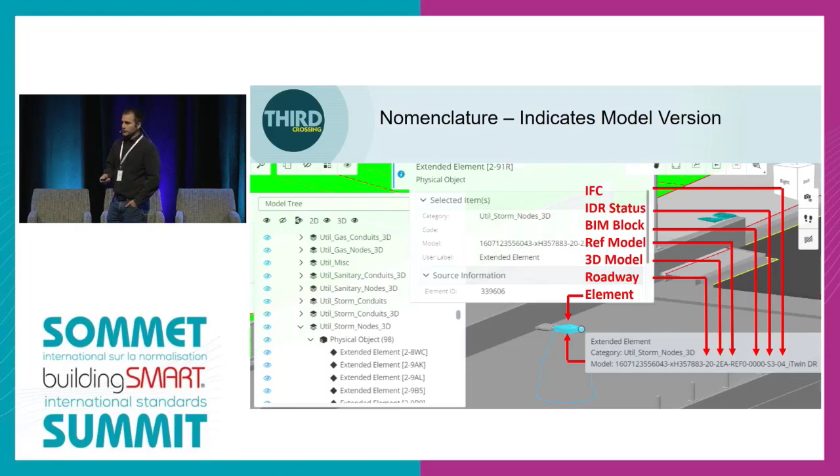The model progression followed a predetermined course that provided us direction on where our model was at each particular design phase, with the help of suffixes. There's an alphanumeric code we used. For example, for components in the model, you'll see we're highlighting a bridge scupper on the bottom, with identification and suffixes in the bottom right corner. Reading this text string tells us what version the model and block we're working in, and the direction we're going. In this case, we're doing an IDR for the actual IFC drawing itself, shown by those little numbers in the corner.

One of the key advantages of using the IPD is that it promotes a highly collaborative work environment. We all have to get along, you know.

So the design phase had an interdisciplinary review process at each design phase that allowed the team to collaborate and work together to develop, to provide comments on the designs as a group, but also be able to see everyone else's comments live in the 3D model space.

So we would get together as a team and resolve all the comments that we could at that particular design phase. So if we're at 60% design and we weren't actually all the way done, some of the comments had to be deferred to later phases of the design. And then we would address it once the progression of the design occurred a little further.

Now, the key benefit of using BIM here in the 3D model space was conflict resolution and identification. So we know where our pipes are going, if there was a pier in the way or whatever like that. And that really saved us a lot of money and heartache when it came time for construction and enhancing our construction methodology. I'd like to take this time to pass on to Francois to talk a bit more about the main span.

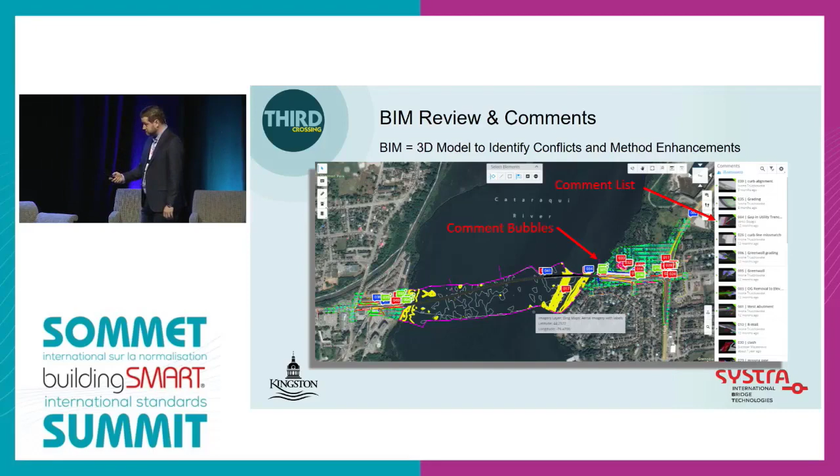So the next part of the presentation is going to be focused on the main span of the bridge, which is the part that is in focus here, right? It's the part that we at SYSTRA design. What's a little bit special about this zone is it was architecturally a little bit more challenging than the rest. You can see it's like a main arch in the middle, and you have 2 half arches on each side.

I'm going to talk here about the softwares that we use to generate this BIM model. We use Tekla, like Dan said a little bit earlier. So this is our main authoring software. This is where our BIM model resides.

So we use Tekla to integrate all the properties in the objects to be published in IFC further down the road, and we use this to leverage that inside the BIM collaboration tools. We use Tekla as well to generate reference drawings and so forth.

You'll see further down as well that the model is LOD 300, just because it was required that way in the BIM execution plan, but Tekla had the ability to push it further to LOD 400 if ever it was required.

Next software is the little bug and the little animal you're seeing here. So this is Rhino and Grasshopper. This is a parametric modeling suite that interfaces with Tekla, because Tekla doesn't have parametric modeling.

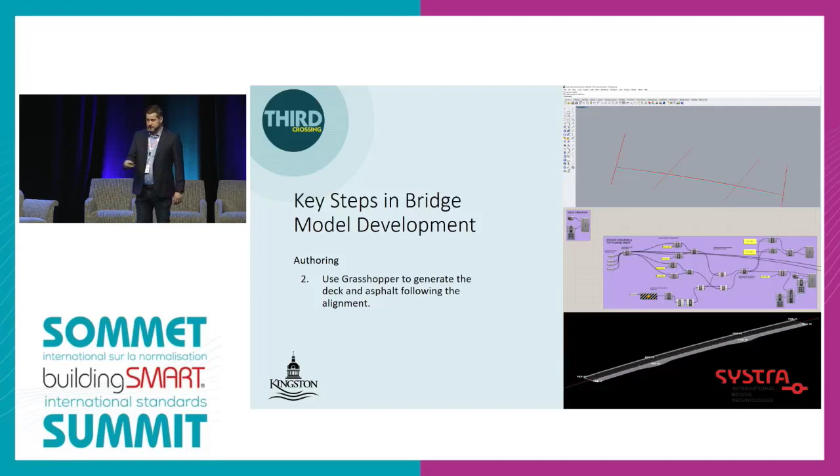So you see at the bottom we have the deck and the asphalt. This was all generated through Grasshopper inside Tekla. There's no manipulation inside Tekla to generate that.

So next slide, the next step was to create a substructure. Here the step looks fairly easy, but the challenge on that specific bridge was that piers 18 and 19 you're currently seeing are not perpendicular to the bridge alignment. So it created some form of challenge you'll see later, but it was really crucial to get these two right at an earlier stage.

So next step was creating the four girders that we have here. They kind of look similar to your eye, but since the geometry of the bridge follows a certain path along the road alignment, and the piers are on an angle, that creates four different girders. So we had to mitigate that using parametric modeling and the algorithm to make sure everything was in place and done in a speedy fashion.

Next slide. We're slowly building the bridge. This was meant to showcase how many diaphragms and bracing there are inside the bridge. There are 534 different parts, and they are all unique. They all have their own working points, and it all follows the geometry of the girders. That was really a challenge, and again we used the algorithm to allow us to create this and deal with changes, without having to redo these 534 parts over and over each time there was a change.

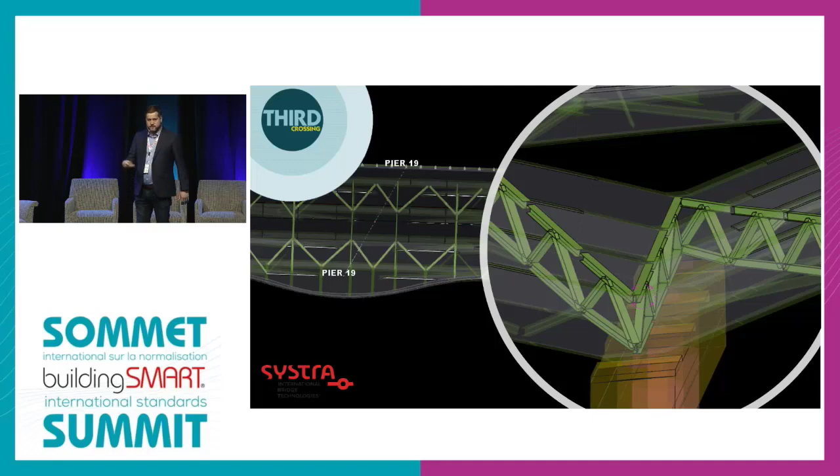So here we see a zoomed in version. You can see at the bottom of the pier the bracing there. You can see that the geometry is a little bit funky - it's just the nature of the geometry that was like that. And you have a plan view as well for reference.

Last step for the authoring was putting the final touches. Like you see here, you have a 3D lamppost that was provided by another discipline, so we could integrate a 3D model brought by somebody else inside our BIM model. We have the railings, we have the guardrails as well. Everything was modeled in, again, using the algorithm.

So that specific part is the part of the analysis. This was modeled in Larsa 4D, done for beam elements using variable characteristics and the study of the bridge's dynamic behavior and different loads. I'm not going to dwell too much on that.

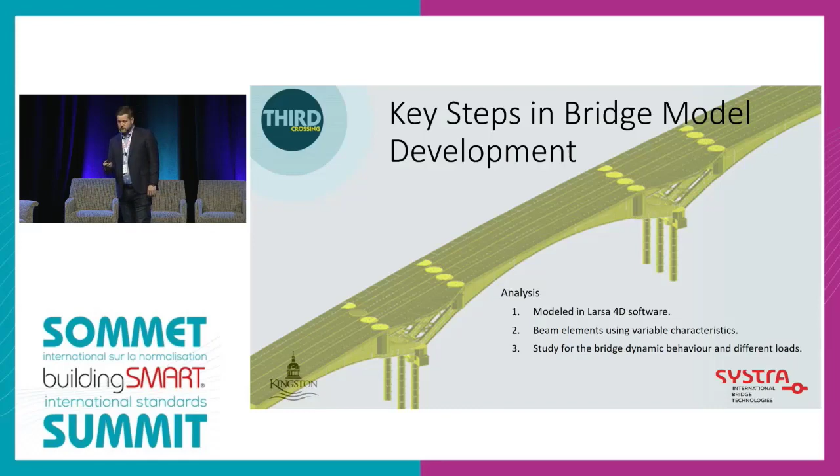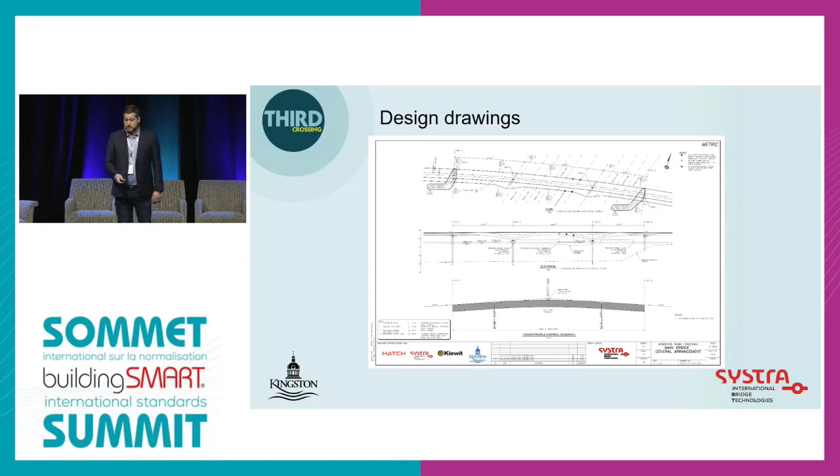Naturally, or maybe I could say unfortunately, we have to do design drawings from the BIM model. So here we see an example of the 75 drawings we have to do, because this is still required.

So that's the specific rainbow bridge. This is a fabrication model that was done by Tenca for Walters Group. They kind of reproduced the bridge inside their own software because they didn't want to use the BIM model. In this case, the BIM model could have been used, it's just that they chose on their own not to do so. So this was done for fabrication, creating the files and shop drawings required. But we also have at SYSTRA the ability to do this part - we could have leveraged the BIM model to do the shop drawings as well, instead of redoing it.

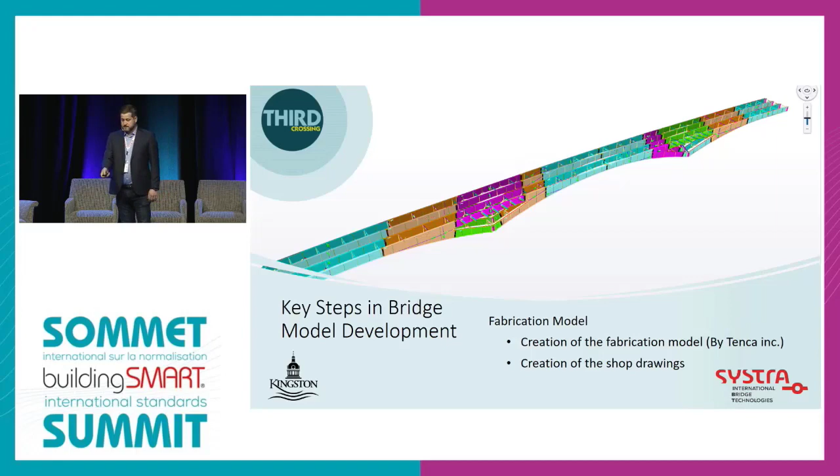As a proof of concept, we did real-life imagery with drones. We leveraged the BIM model to create a flight path, because our BIM model is geo-referenced. So we were able to create a flight path for the drones - the person just had to go on site and start the drones, and the drone has a predetermined path to follow. So this was the result.

We were also able to produce a point cloud. The point cloud is useful for us to bring back inside Tekla to validate if everything is at the right position on the field. And we can have multiple iterations of that specific point cloud to follow if we need to follow the construction sequence. So that's another example.

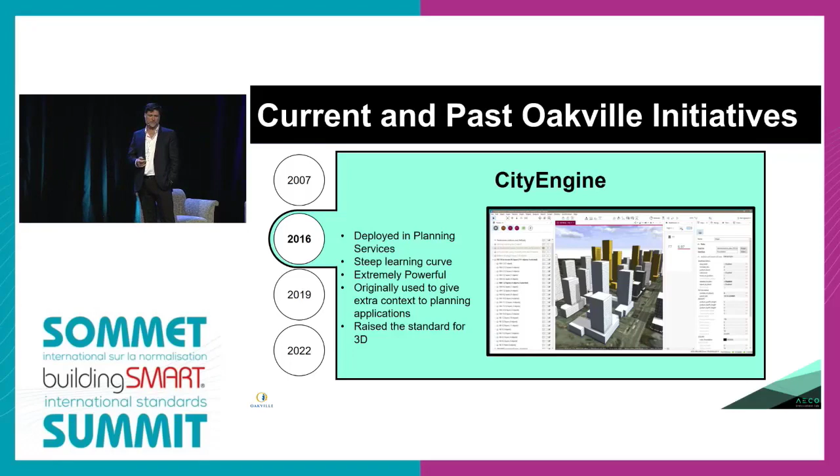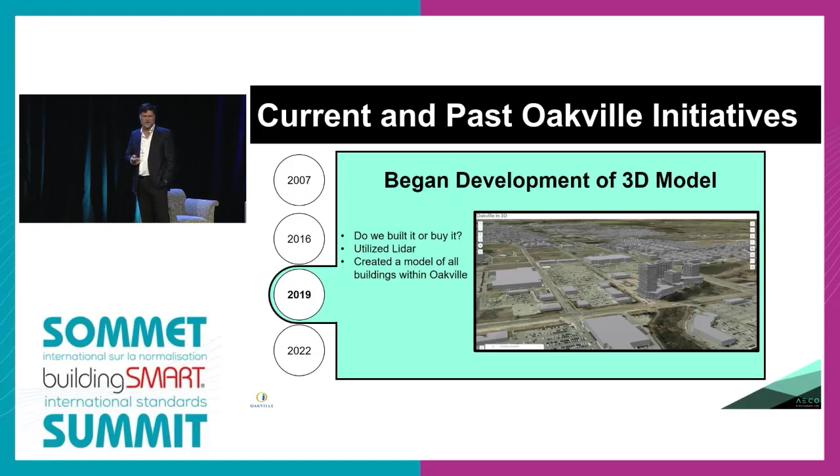In 2019, they began to develop three-dimensional modeling, following a system used elsewhere in the world — I believe Finland used a similar approach using LiDAR to capture their municipal infrastructure. We continued to build on that with additional applications to try to add more value and improve the information.

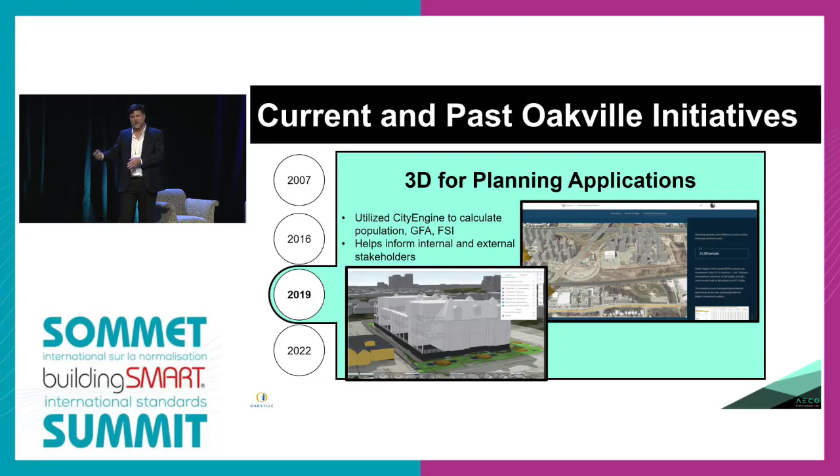While hearing all this, I'm thinking: why are we doing this independent of the technology that's out there, the BIM models being created? Municipalities are on one journey with their planning approvals, but they're missing a tremendous opportunity to work with the infrastructure created by the modeling firms out there right now. As a further example, the latest version was in 2022, where we started adding VR to help other jurisdictions understand the importance of modeling, what information we can gain from it, and what opportunities we can take advantage of to actually change the way we do business.

Recently we moved to ArcGIS, where we've been working to integrate our zoning bylaw with our mapping system so that an applicant could look at the site and put their model on it to see if their model actually fits. I believe Halifax is a little ahead of us on this model, and they've had great success with it.

We're trying to use this to also make better planning decisions. What we're trying to do with this BIM pilot project is, rather than responding to what the industry has and developing a system to give our approvals based on that, we want to work with the industry.

And develop an approvals process that is in harmony with the standards being developed today. I noticed we talked about design, construction, and asset management, but from my perspective we're missing the approvals piece. That comes during the design process, but definitely before and during construction. So it's important for this group to expand into other government agencies, bring them to the table, and understand what process they go through to grant approvals, whether it's Transportation, Conservation Authority, or whatever agency has influence over the project.

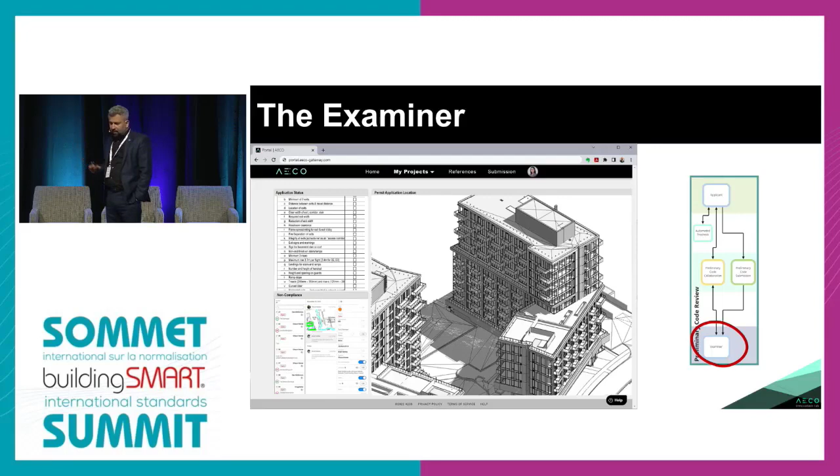With that automated tool, it then moves towards a collaboration space where municipalities can start providing feedback. This is the examiner view - they see a number of applications and can look at the BIM model in a BIM viewer. What's perhaps most interesting here from a building department perspective is that a lot of the checks that the building department does on a submission could actually be facilitated and streamlined with a BIM model in hand, like checking fire exit distances, bringing the building code right up there.

It took us about a year and a half to two years to convince the provincial government of Ontario to allow us to digitize the Ontario Building Code, Volume 2 of the Building Code. These are the challenges where we can't really wait for government to take that long to move forward, and that's where we could use some federal support and other provincial support in actually moving things forward.

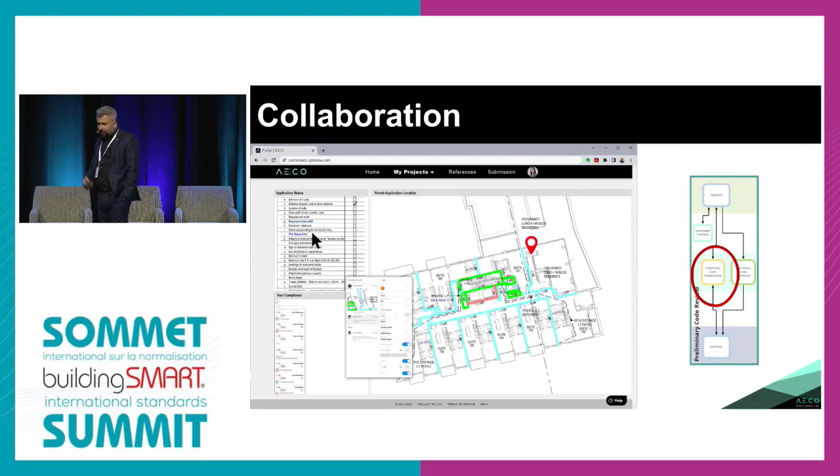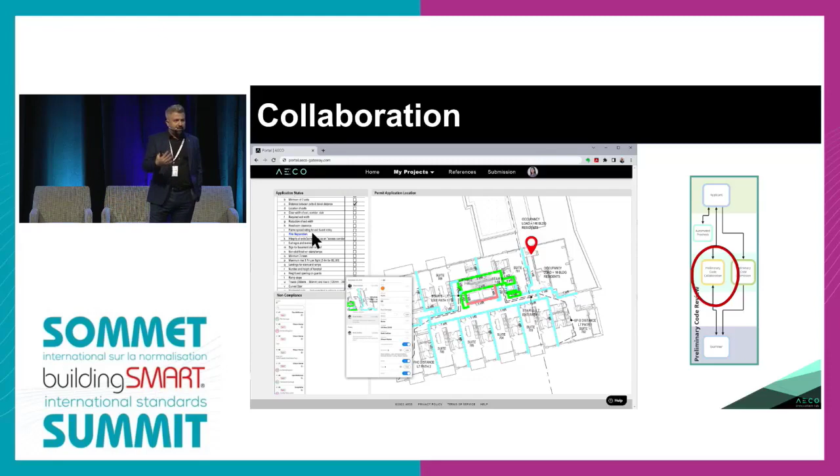But there are other checks, for example fire separation. We were working with the building department, and they showed us how they take manual steps of highlighting and color coding fire separation on drawings so that inspectors, when they go on site, can check it relatively easily. Well, that information already resides in BIM, right? So by accepting a BIM model and setting a standard for what color coding you want in place, that information is already there - you don't have to do that manual work at the municipality. These are just specific examples; there are many more where having a BIM submission could help facilitate the development approval process.

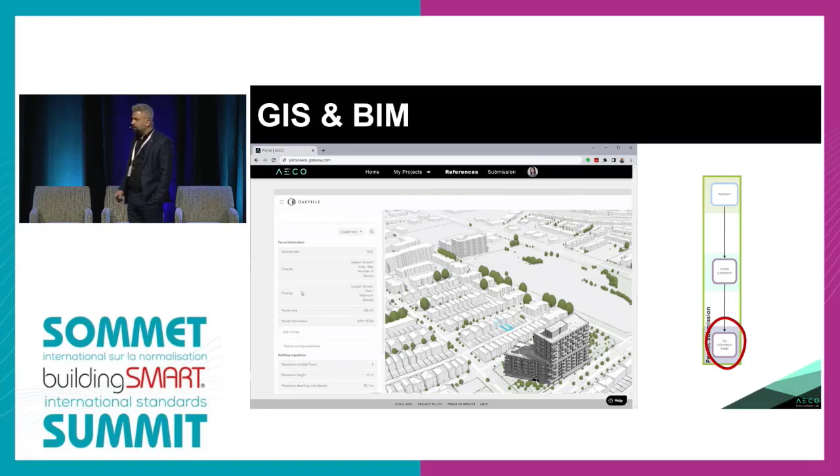Of course, BIM GIS, being able to evaluate a building within its urban context. We all know the benefits of that. Being able to have a data-centric approach, have a database of your city in a GIS environment.

How many buildings have geothermal? What are the energy efficiencies? A number of different dashboards that you can run at the city level once you have this information in there. And of course, simulations, being able to simulate what different planning configurations could mean for the city, from resilience planning to land use, a number of different opportunities there, disaster recovery, the list goes on of what you can do at a municipality if you actually have that information.

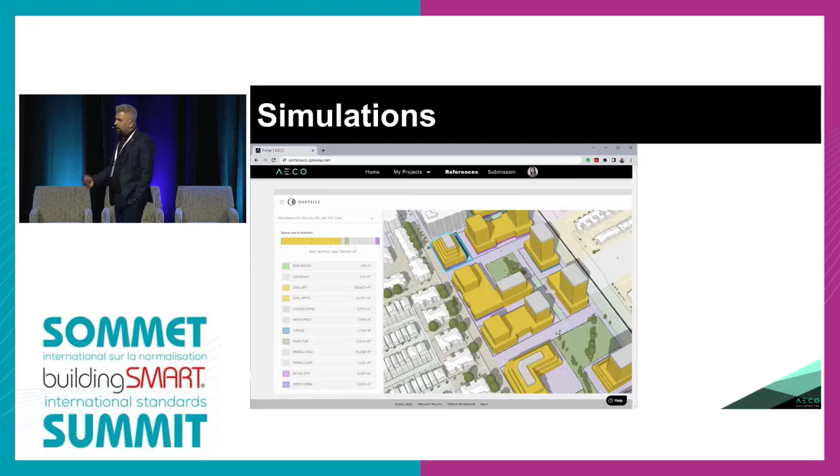With that, I would like to acknowledge the collaborations on this project. It was a project between AECO, Town of Oakville, and buildingSMART Canada, specifically Claudia Cosdorto, who did a lot of the heavy lifting for us on this project, and Gord for his support. Also, we have a number of different industry partners on this project. It's basically an open invite to everybody else, whether it's your government or the private sector, who want to work with us in this next generation development approval system for Canada. We would love to have as many collaborators on this as possible.